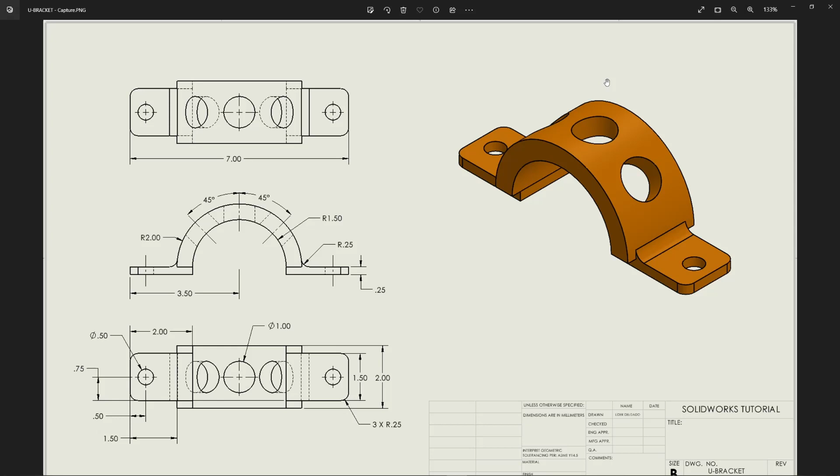Select new part. This drawing is in inches, so let's confirm that we have the right units. Let's go to options and select inches. Now in the front plane, let's create a sketch.

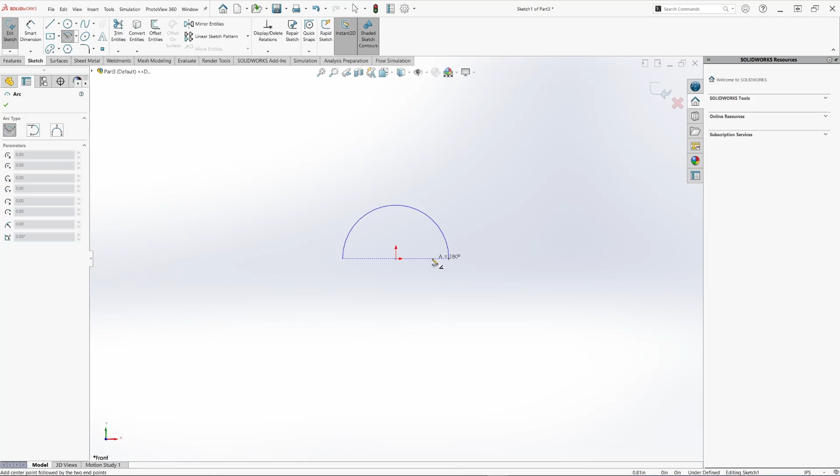Now let's select center point arc. Select the center of the arc, and then let's create an estimated rough shape of the final shape. Now we can close the gaps.

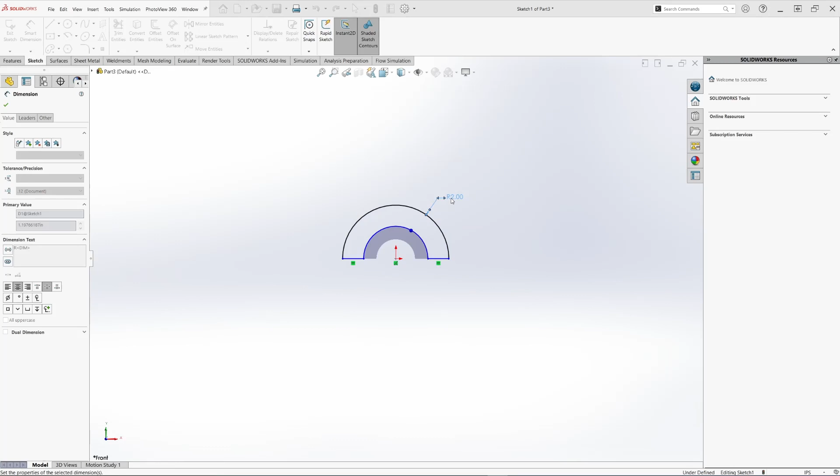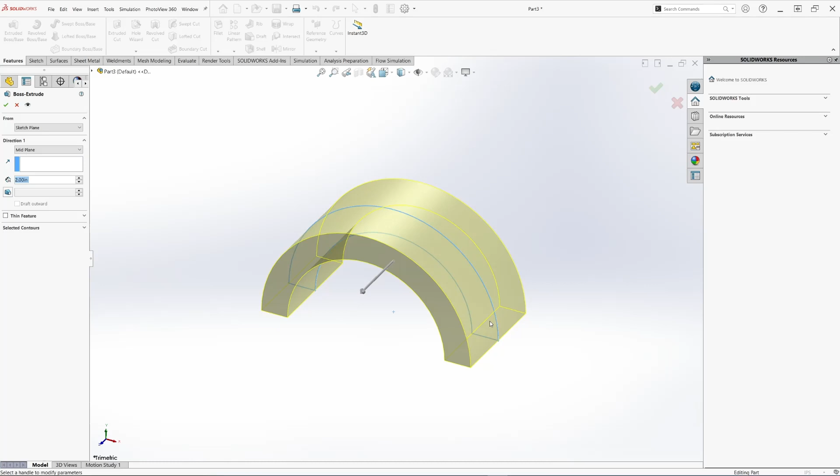Now we can define this as 2 inches, and this as 1.5. So now we can create an extrusion, select mid plane, and 2 inches for the depth. Mid plane means that 1 inch will go for each side, and the plane will be exactly at the middle of the component. So we have our initial arc.

Next we'll create the arms for the bracket. So select the bottom face and select creating sketch. Now let's create a rectangle and let's define this. This is supposed to be 2 inches, and this is...

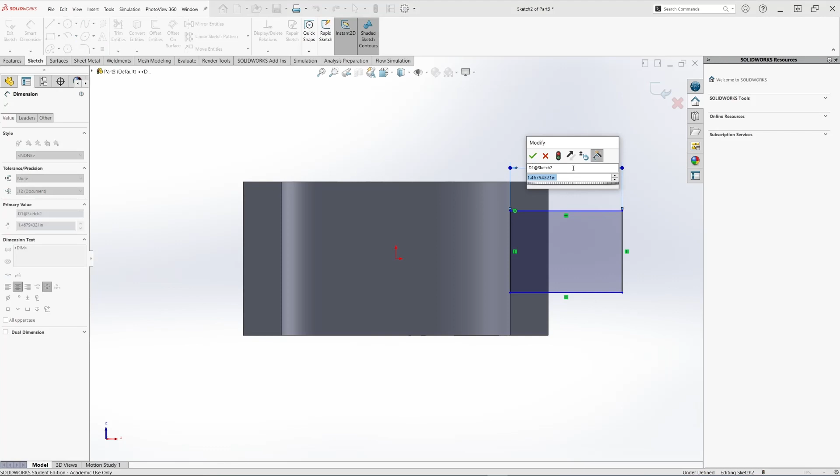1.5. We can make that 0.25 so it can be at the middle of the component.

So now let's create some fillets. Select the fillet command, and per the drawing, this is a 0.25 radius fillet. You can do this in two ways: on the sketch face, or you can create a fillet on the feature command.

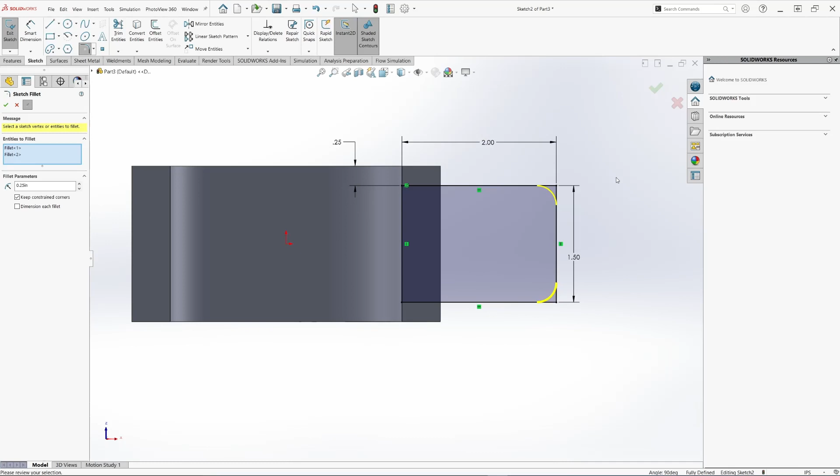So that's our fillet, and then lastly we will create a circular hole with a diameter of 1/2 inch and a distance from the edge of 0.5 as well.

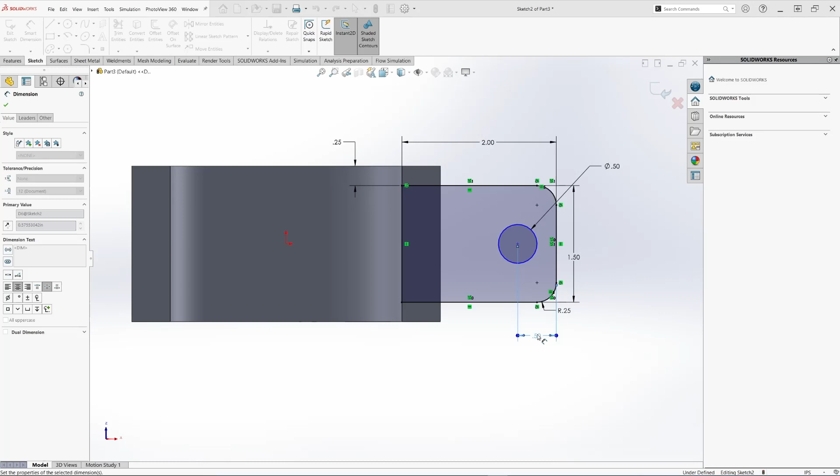Now we're ready to make an extrusion, and now we can select blind, so you go only one way, and the thickness of this extrusion is 1/4 inch.

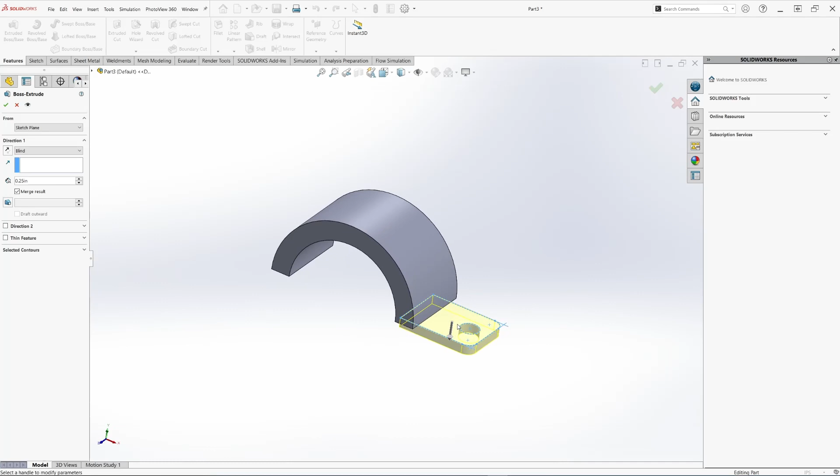Now we have one side of the bracket. If you look at the bracket here, there is a fillet on this section, and that fillet is 0.25 radius. So let's make that. Under fillet, select fillet, select that edge, and change the radius to 0.25.

The next step will be to mirror all these features to the other side. So we need to select all the features that we want to mirror: the extrusion and also the fillet.

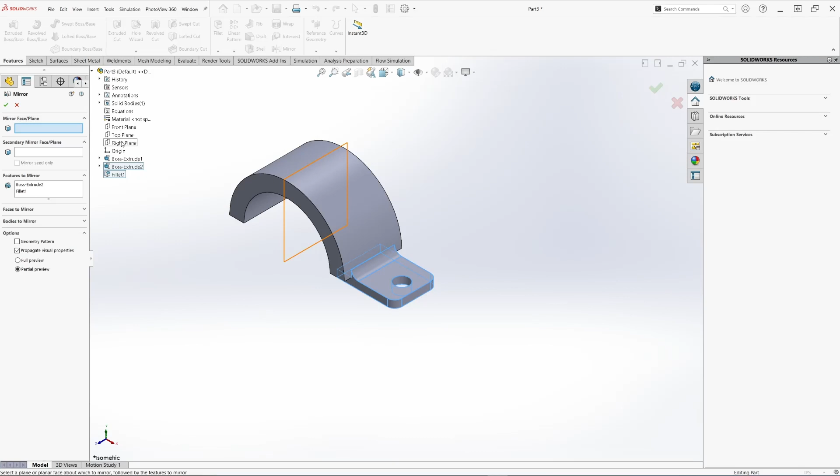Select mirror. The features are already selected, so all we have to select is the plane. We are mirroring it along the right plane. Select the right plane, and we have the other section of the bracket.

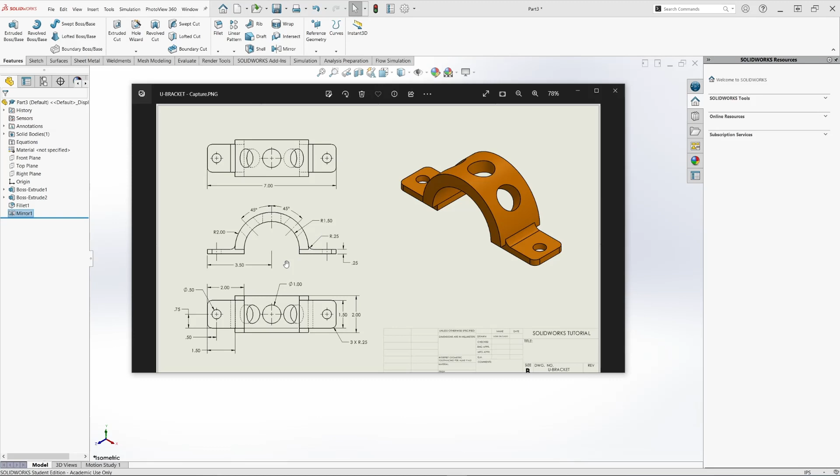Finally, we have to create these holes, cutouts. There are 3 in total on the top section of the bracket. These holes are 1 inch in diameter.

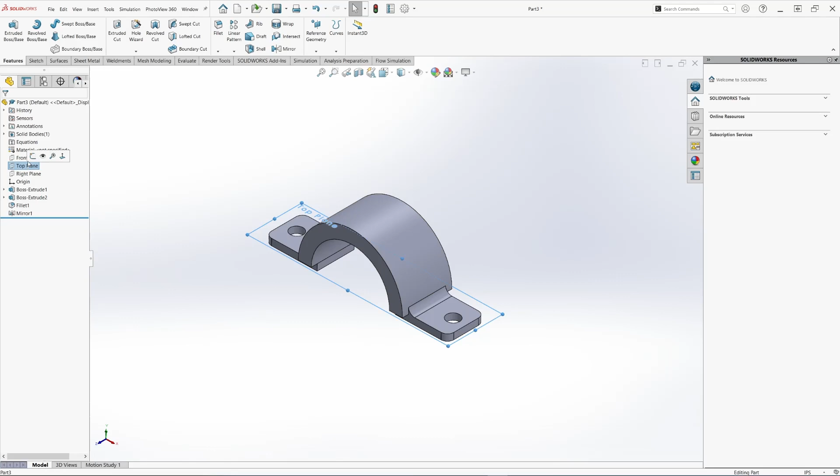So for this, we're going to use a circular pattern to create that direction. First we need to create the middle hole. So we can select the top plane and create a sketch.

As we mentioned, this hole is 1 inch in diameter. So now we can create a cut, select through all, and just flip the direction and hit OK. So we have our first hole created.

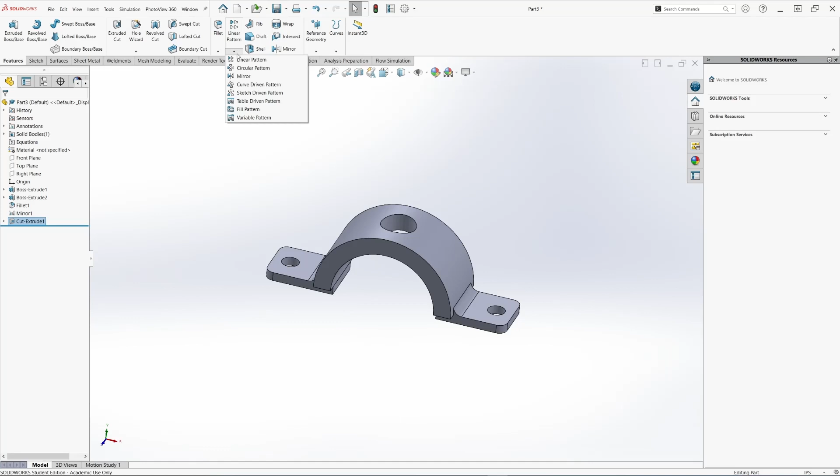Now we need to create one hole to the left and to the right of the middle hole at a 45-degree angle. For that, we'll use the circular pattern. The hole is already selected, so all we have to select is the face of the bracket, so it can create the hole. We need 3 holes.

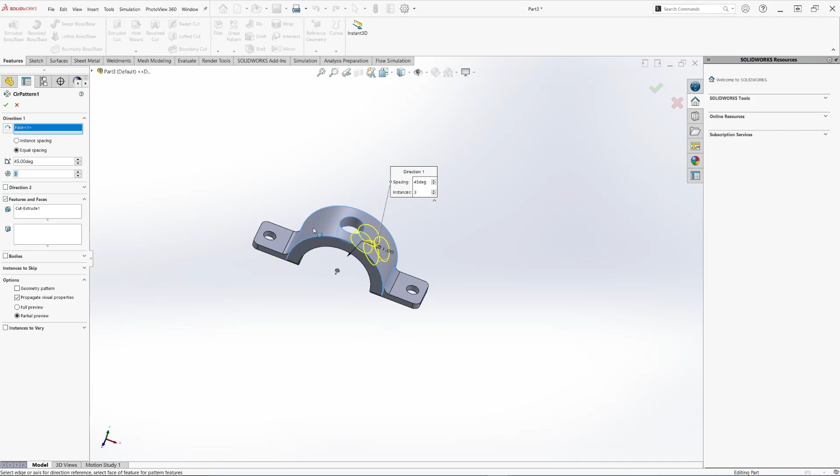If you make this 3, you'll notice the holes will go only in one direction, but we want the other hole to go the other direction. So for that, we'll just make that 2, and then if you click here on direction 2, click on symmetric, and it'll mirror the other holes.

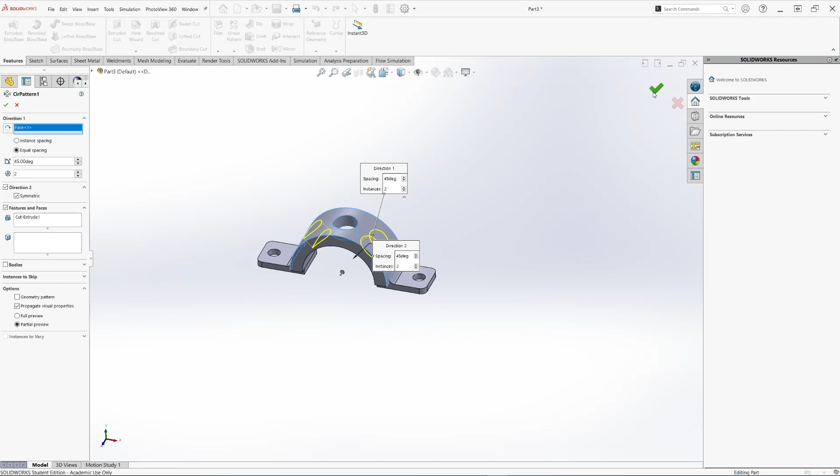That's how you will create this cutout on the top. Finally, hit OK, and that's how you create this U bracket with the help of those commands that we just learned. And this concludes our tutorial. Thank you for watching.